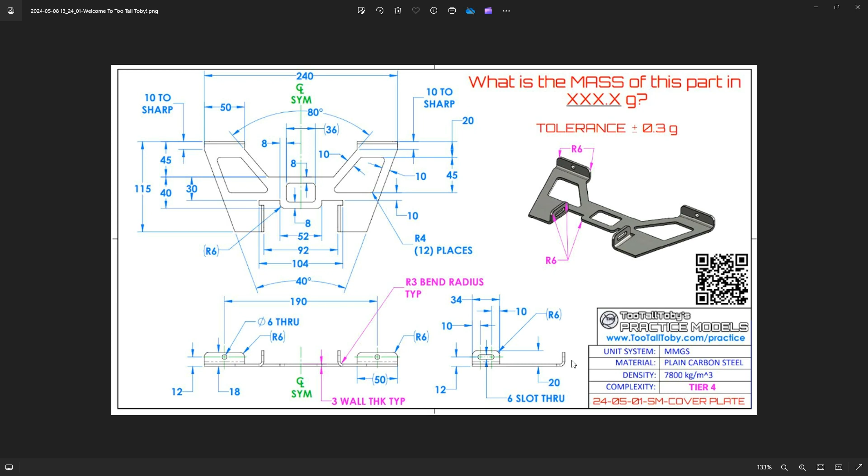In IronCAD, if you're in our starter catalog, there is a sheet metal catalog here. You can also go to more catalogs and go directly to the sheet metal catalog. So what we'll first do is drop out a stock - it doesn't really matter, I'm not going to pick any particular stock here, I'm just going to select one.

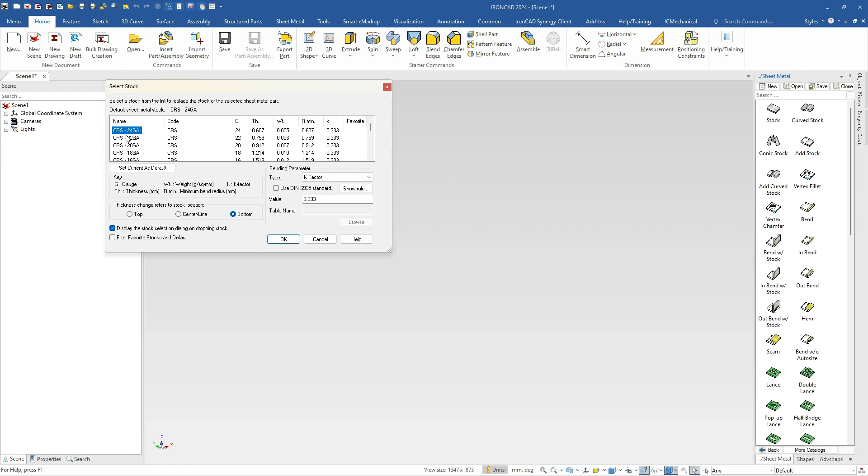I'm going to right click and go to the part properties, and change the thickness and minimum bend radius there. We know it has a thickness of 3 and a minimum radius of 3 as well. So that's our starting point for our model.

Next, most of this is done in the sketch. We don't really have good ways to design the shape with all these constraints that are placed on this one specifically.

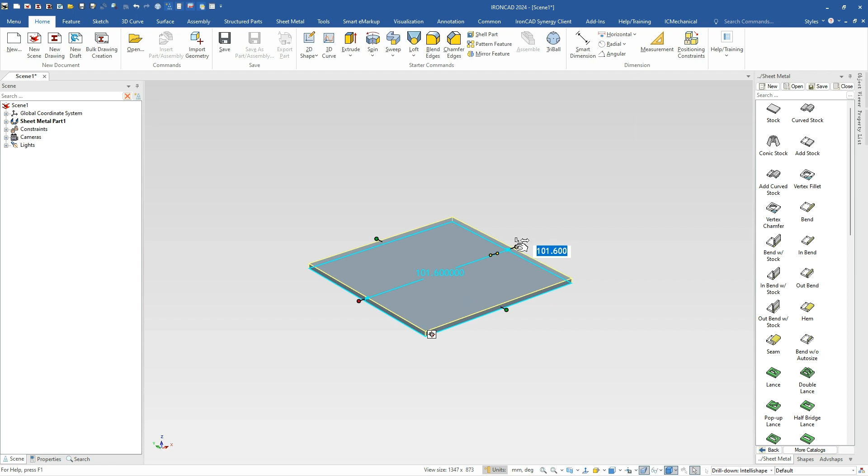IronCAD's handles work really well for in-place design, so you can refer to and snap to existing geometry, whether they're size box or these curve handles. But we'll show you how to do this in the cross section as well.

So we're just going to edit the cross section. In this case, we're just going to select everything and get rid of it to start off with.

What I'm going to do is basically start with the overall outline of this geometry, and we can just start with a polyline, for example. We're just going to start somewhere up here - you can see on the left it's giving you some coordinates where you're at in space, so it doesn't really matter too much for us. We're just going to draw our line out here, at some sort of angle.

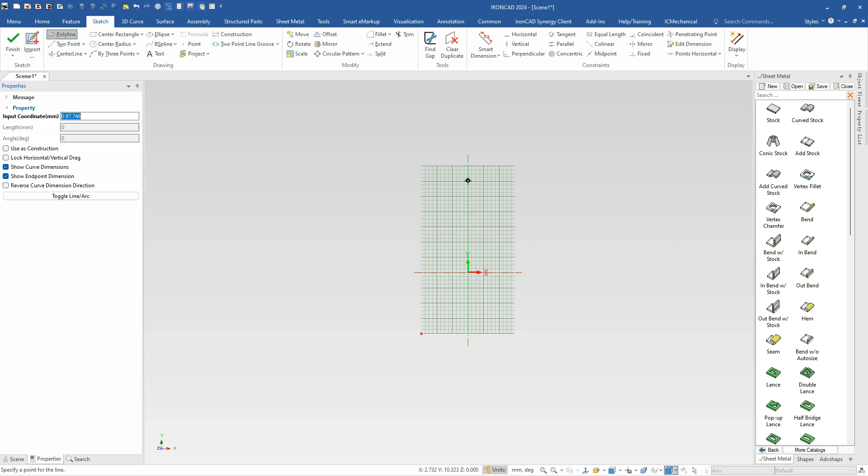We're going to go up - this is going to be a 10 value. We're going to do our 50, go back down, align to this. And all these dimensions that you see, I'll show you what those are in just a second. So we're just going to draw this down - we've got an angle shape here.

It's going to come up - it should be horizontal, by the way. Come up, and we're going to come over and go down. I'm just going to leave it at the line here, at the down line.

So a couple things here - I didn't draw this horizontal, so I'm just going to pull these over to make these horizontal and vertical inside here to get a starting point for our geometry. And we can adjust this stuff around at any point in time afterwards.

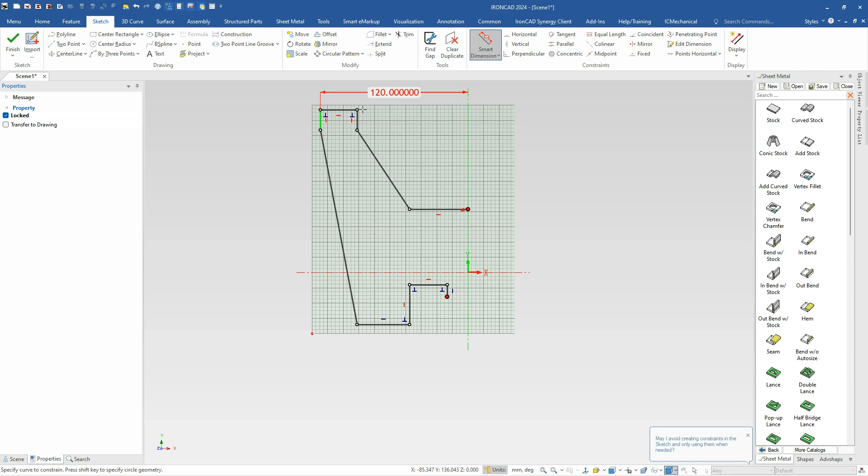So what we're going to do is use this starting point and put some dimensions on here to drive it. We know, for example, how far this is offset here, which is 120, and we know this curve - let me zoom in a little bit - we're going to set that to 50 to move that over in there.

We also know the angles here - we know this has an angle of 40. We're just going to put that at, this is an angle of 80, so it's going to be a 40-degree angle there, and this angle for this shape has an angle of 40 at the bottom, so that one's going to be a 20-degree angle there.

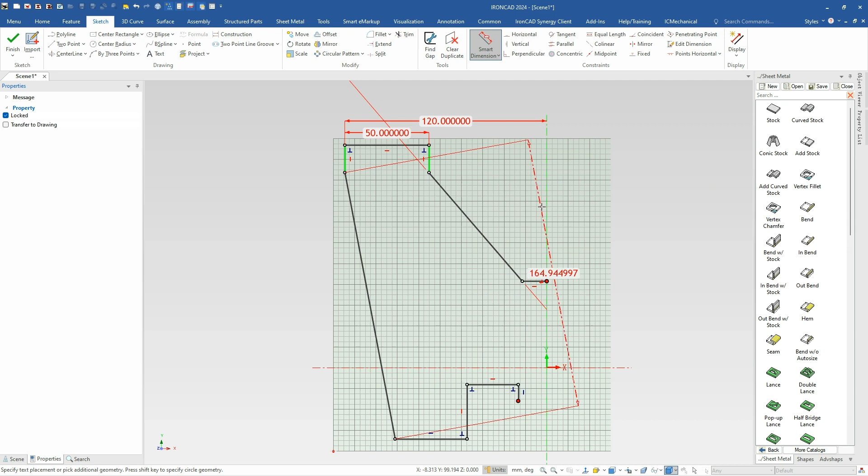Again, if I want to make these constraints to maintain this, I can just lock these down - make this one vertical all the time, I can lock that as well, so make sure those maintain. Some other things we know - the dimension from here to here, so we'll go ahead and put that dimension as well down here to the bottom of this.

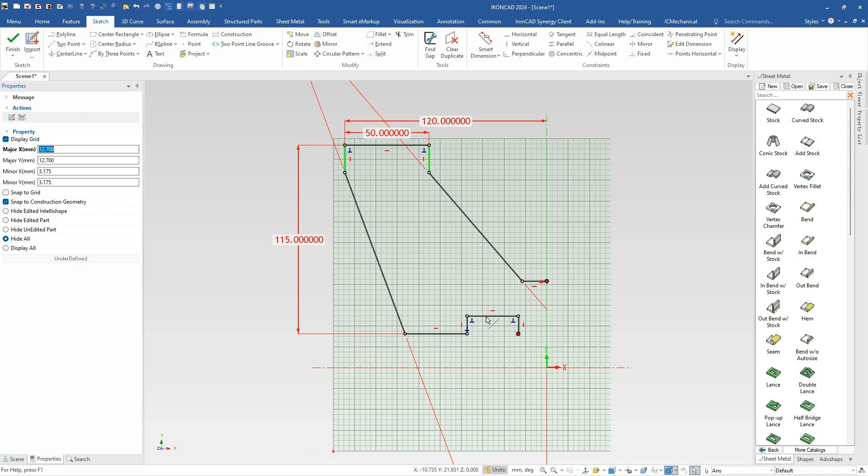We can just pull it off, and we know that's at 115 inside of there. So this doesn't move anything around, so we can just pull these up inside of here and adjust these however we need in our model. We can pull these up to give us some more clearance and some more space in here just to see what we're working with. So this is our starting point for our model.

And why I left this model length down here is because it's actually defined, this line is actually defined 10 millimeters from this offset curve. So there's an offset there, then this is driven from there a certain distance. We can draw the line in there.

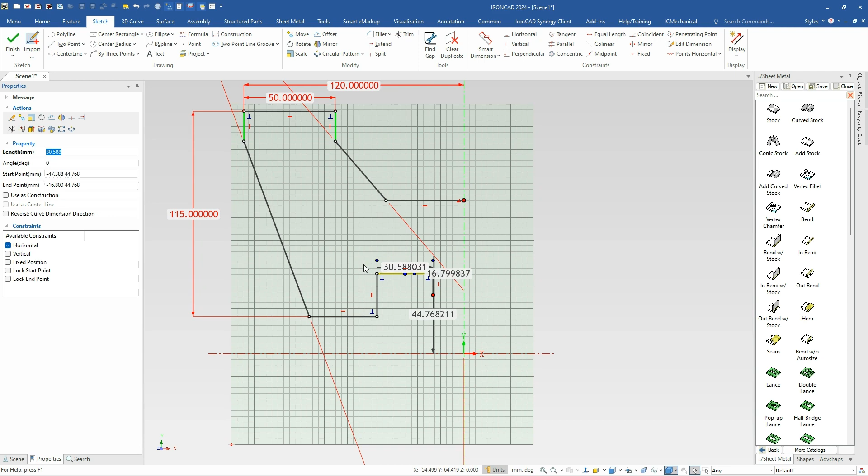I'll just walk back through this. So a couple other things we do know, these two curves are actually 10 millimeters as well. So let's go ahead and put those on there as 10 millimeters for that. And this is 10 millimeters as well to drive those up. So now we've got that set, we can do some other things.

So the other things they're using is offsets. So we'll go ahead and offset some curves. For example, this curve at the top, we're going to offset that, and it's got a value of 20 inside of here. We're not going to use any constraints, just offset these curves and get an idea where they're going. So this one's going in the wrong direction, so let's just flip that down to get that to go down 20 millimeters from the top edge there.

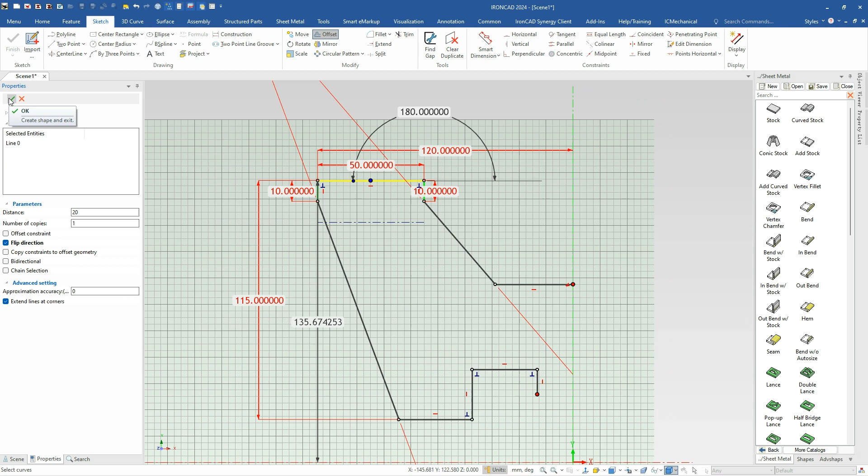These two are offset 10 millimeters, so we'll select both of those curves and offset those 10 millimeters inside of there, and they're already going in the right direction, so we'll hit OK. And then last, we're going to offset this one, which has an offset of 45, I believe, so let me double check that. Yeah, 45 millimeters for that to give that bottom curve there. And what we're mentioning is this line here, this bottom curve, is actually 10 millimeters from there.

So I'll show you a couple ways to do that. One is we can just offset this curve again, there's a simple way to do it, just offset 10 millimeters again down, so we know that's where this curve needs to be aligned to this geometry. So one thing we can do is just pull that up until it aligns, so we know that's 10 millimeters from that edge.

And now what we can do is just do the extending and trimming on this geometry. So let's extend this so we can see where it's extending to, and if you hit the tab key, it'll extend over to the next line in the path, which is where we want it to go. Extend that one down, then we just have a series of trims here, so we'll trim off this extra geometry inside of here, so we don't need any of this geometry out here. And just walking around, trimming that off, and we really don't need these two curves either, so we'll get rid of that geometry, and we have that basis for our geometry.

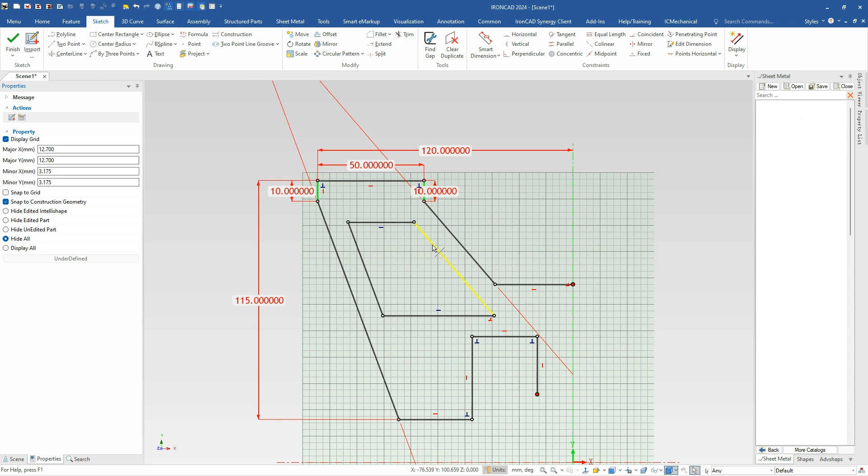So this is the starting point here, and now I'm going to select this, do a fillet on it. So I double click to select all of those curves in the chain, and then I'm just going to select a vertice and drag. And when I right click, I can type in the value for that, which is 4 millimeters. So we can just do all those at once to apply that.

So now we have some other information that we need to know. A couple things, we know that this curve, so I'm going to turn off some of these things, so you see is curve dimensions, and we have see endpoint dimensions. So this is telling us the endpoint dimensions of where these curves are. From the reference, usually the XY axis here, so we know how far this line is out from that, or you can pick on one of these lines to get that as well, to see how far it is from that line.

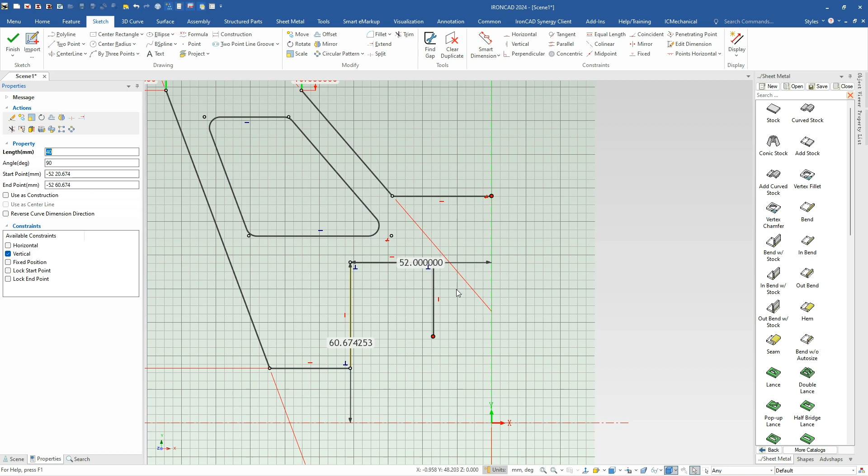In this case, the furthest distance is 104 total width between the lines, so that's just half of that, so that's going to be 52 for that. So that's just going to move that line over 52 millimeters. So we've got this one essentially sitting 52 from our center point reference. We also know that this curve needs to be a distance from here, total of, let's see, 30 from this top curve.

So what we can do is just essentially move this reference line up here, and now it's telling us where this curve is. We can change this to 30, and that will drive that curve up, giving us that distance of 30.

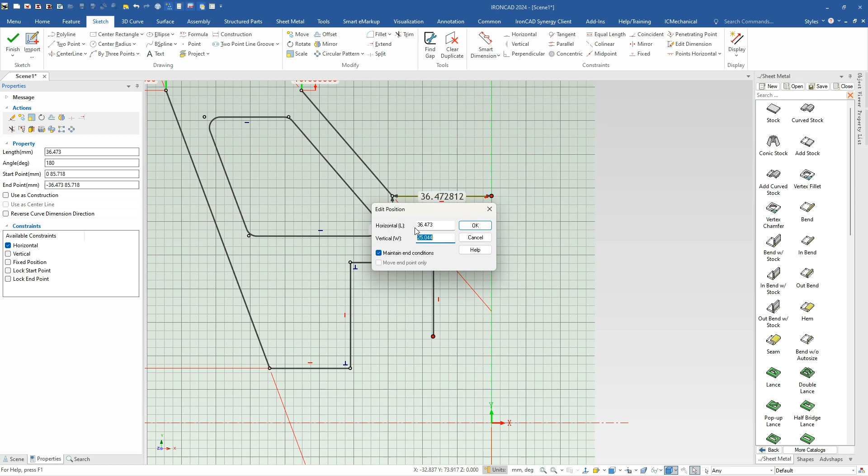We've got this one set, and we can also go ahead and set the distance for this curve, which is a total of 52, so that's going to be 26 for that one to define it. Now we can define how long this one needs to be.

From here to there is 40, so again we can just do an offset here of 40 for that curve. That'll place it there, and again we can just do our trim to get that off. So that basically will give us our profile geometry for everything in place.

So this is our 52 from there, which gives us a total of 104. This one reference here is 26, which gives us the 52 inside of there. Again, this one, if we pull this line up here, we can refer to that as 40 inside of there, so we know what that reference is.

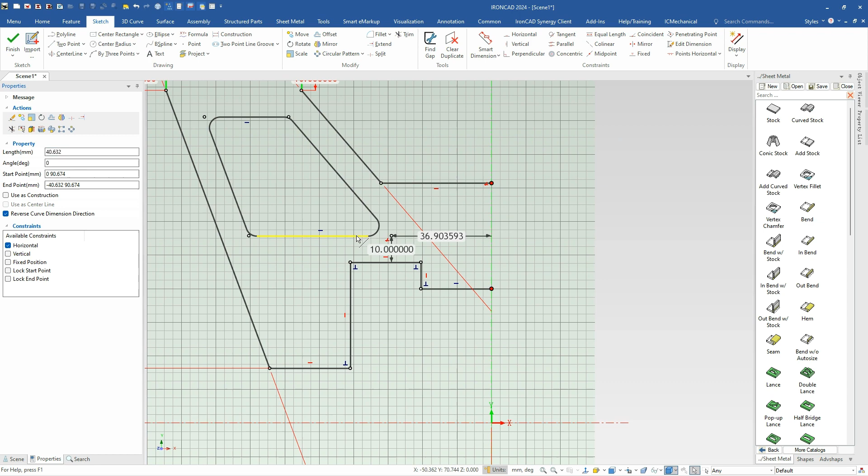We select this one, we know it's 30 from there, and if we want to know that, it's 10 millimeters. So that's just a way to do it without doing a lot of constraint dimensions. We have a lot of curve dimensions in our sketch, so it's handy to use those to move curves around, and you don't have to have the constraints. I just put some on here to show you.

You could have done the same thing with our curve dimensions because they're all on there. We can move these around that way, but I put some on there just so visually I can see some references, key references that I want to make sure I can see easily. The rest of them I know they're spaced correctly, nothing's going to move on this, so I'm good to go.

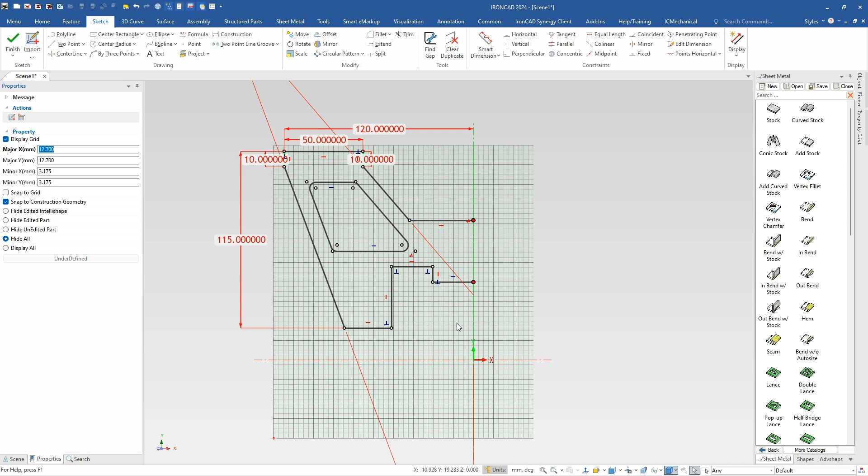So now I can just go ahead and do a select all of all this, which is just your standard Control A to select all that, and we're going to mirror that to the other side, using our curve there, center curve, our y-axis, as the mirror plane. So now we've got our geometry to the other side inside of there.

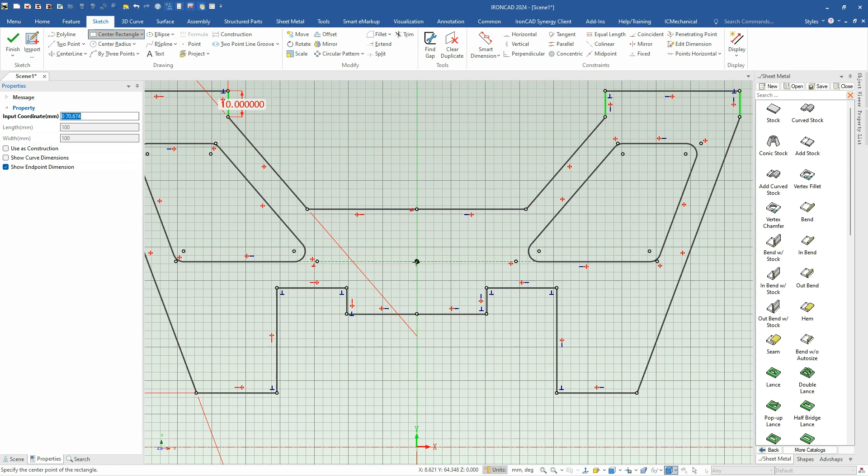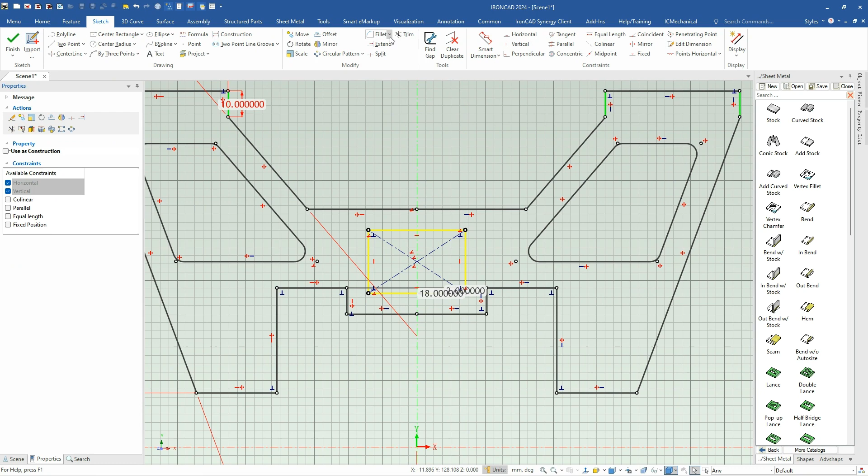And then we can select it again by double clicking and do the fillet on that one, because it also does have 4 millimeter on that as well. So that kind of gives us our base shape here for our model. Then we go ahead and hit finish, and that will give us our stock base profile.

Next, we can do some bends on this geometry. So we know these are the overall reference that we want. Again, we can look at this by selecting the curves. We know that total distance is the 115 there, so we want to maintain that. We don't want to adjust that.

So what we're going to use is we have a series of bends in our sheet metal. We have a regular bend, in bend, and out bend. So we want to maintain this outer edge. We're going to use an out bend and drag and drop that onto that sheet metal, so it'll maintain that edge and move the geometry in to give us our bend.

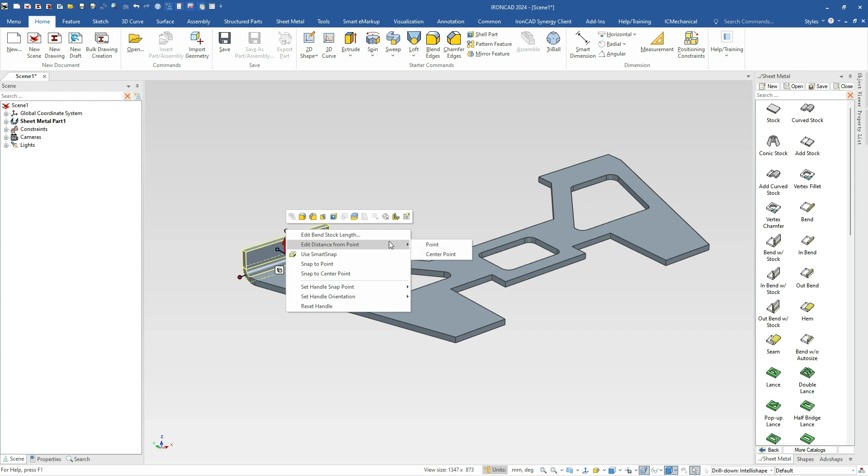Next we just need to set our height. We're going to set our height from the bottom edge of this, which in this case is 18 for this one, which is the 12 plus the 6 millimeter radius, which we'll show you in just a second. So we've got that shape, and then we'll go ahead and put a profile here. They have a 6 millimeter through hole on there, so we'll go ahead and put that on there as well.

Next, we want to put the other bend here. And now in this case, we want to keep this edge because this is a total distance. If we select these two edges here, these edges are set to be 104. We want to maintain those and add material to it.

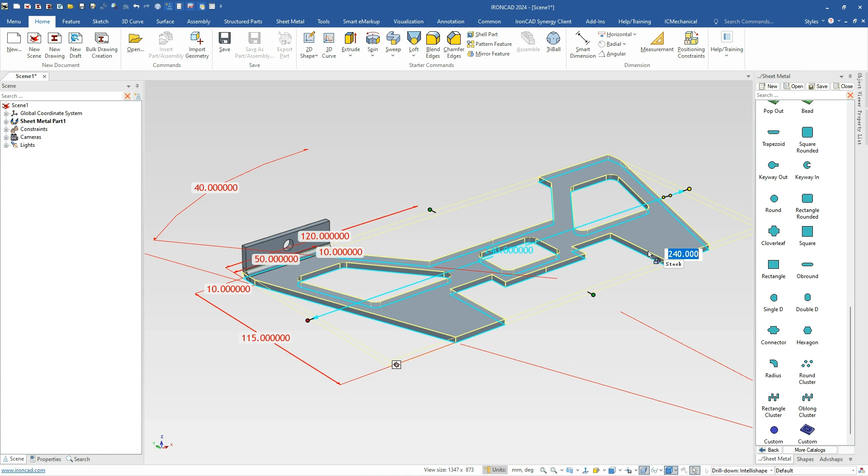So in that case, we will just use the regular bend and drop that onto this edge. And we do know that this overall length in this case is actually 34, so we'll just double click that and set that to 34.

Inside of there, and we can do the same thing, edit distance from here to select this to adjust it. But another way to do that is to double click on these, and you have a series of different ways to measure that. So you can use to the end of the bend, sharp corners, bend length to the flange length inside of there. So inside sharp, you can use these things.

In our case, we want to know that the total length of that curve is going to be 20 in this case, and we can set that. So it's the same again as you could have done this, edit from point, select that, it's going to give you the 20. So either way, you can do it. I just wanted to show you a couple different ways to achieve that.

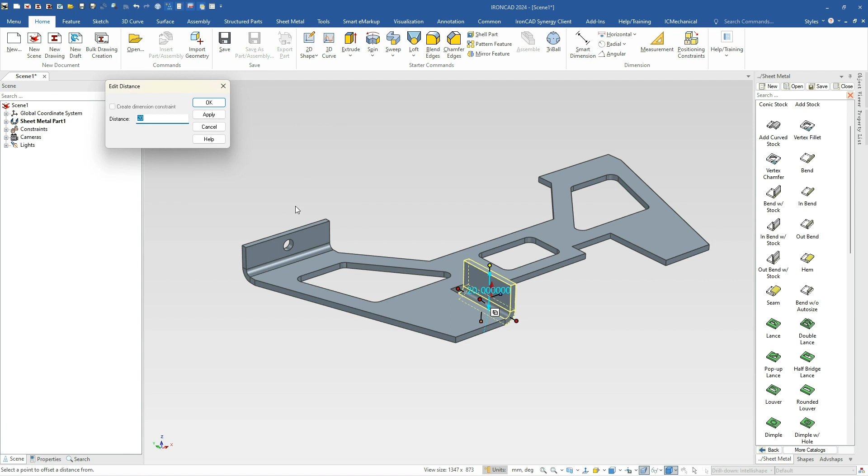Next, we have the slot feature, so we can drop one of our standard slot features on here, but we also have cut features in here. These are kind of nice as well, that this one drops in some orientation here, but we're going to just rotate this around so that it's parallel to that.

And then we can go into our tooling features by right-clicking on this and going to tooling features, and we can set the height or the actual value of this, which is going to be 20 millimeters because it's offset 7 millimeters from the centers on each end of that, and we have a 6 thickness, so the radius is a 3, so that's why it's 20 millimeter inside of there, and hit OK to adjust that shape.

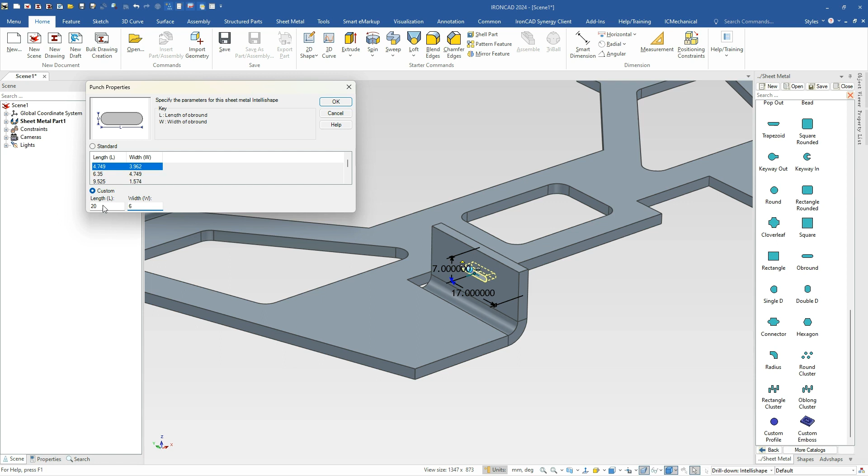And again, we can position this object inside of here if we want to position this, and we know this actually has a height value. Just to do it here, we can just edit distance from point. From here is actually 17 from there, so we can move that down a little bit. So it's not actually on the center of that face. So we can do that as well inside of there.

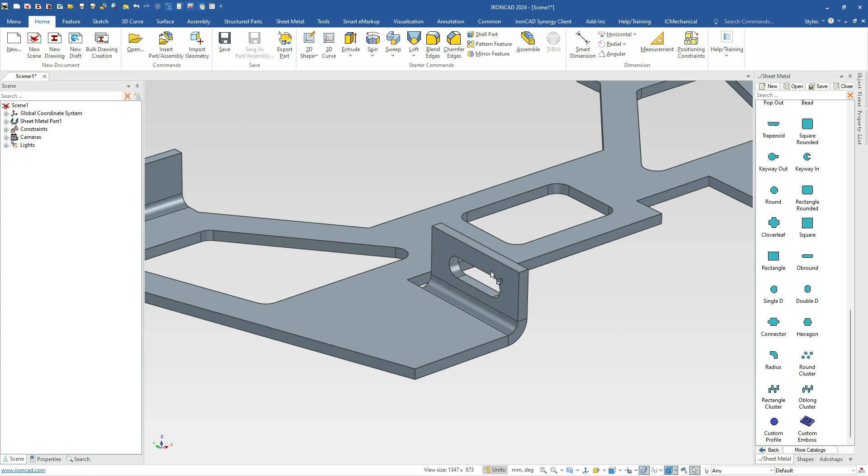Next, we'll go ahead and mirror these to the other side. And so we can select these by holding our Shift key down, selecting all the features that we're going to mirror, which are those 2 bends and the features. And we'll use the mirror feature, and we'll say about this point. And go ahead and hit OK to do that. So now we've got those created there.

The last thing we need to do is some fillets on this. So you could use our regular fillet or blend tool to do these edges, but we also have a nice sheet metal tool here for corner breaks, which can apply blends or chamfers. So we have one that needs to be 6 millimeters for this, and you can do the entire part, which would also get some of these other things on here, like these corners, which we don't want. So we're just going to pick the desired geometry.

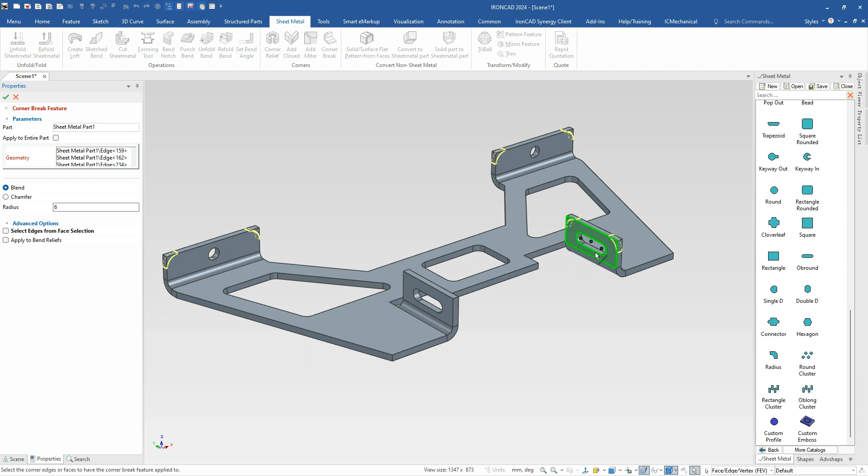So in our case, we're just going to pick these points that we want. We're just going to move our cursor around to pick the points that we want to apply those. So that one there, these here as well. And as we're walking around, we're going to get these inside ones as well. So we want some selective locations that we want to have that 6 millimeter fillet on, and then hit OK, and we can get that. Okay, so those are nice little fillet features that we can add to this thing.

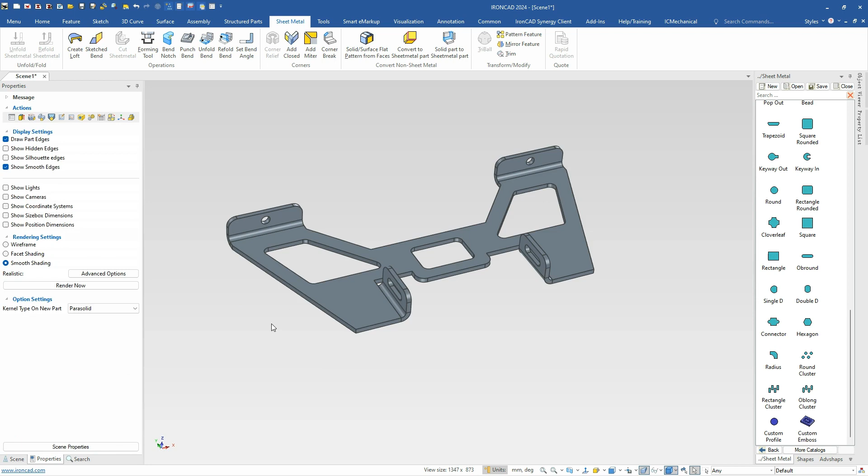Next, we can go into our properties, and in this case, it has a mass density of 7,800 on this, and that should give us 292.5 grams in this model. So since it's a sheet metal, just to kind of show you this, you can unfold it flat just to see that, and you have your bend lines and everything that you can take into the drawing to dimension the flat drawing and the folded drawing together for these models. Fairly easy to do in IronCAD.

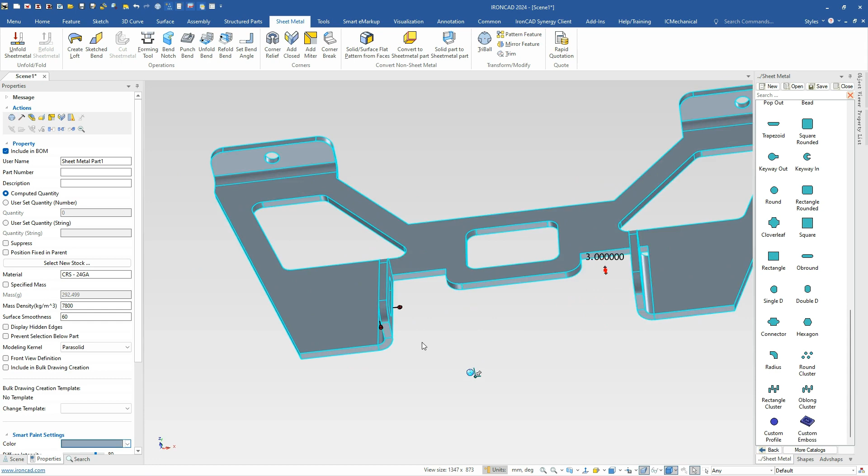So this is just one of the sheet metal parts, but again, you can do a lot of modifications to these. We have part handles on here, so you can adjust certain locations of your bend. So if you wanted to, for example, extend this out, you can easily do that inside of here without even going into the sketch modes to do that. So that's just some things that we do have on our handles.

They're all available here that you can modify all these curves independently. So I can select these to move and adjust, like maybe this could be a different height than that one, easily to do it outside of the sketch with our handles. So just some things we wanted to highlight inside of our IronCAD design with our handles and sheet metal.